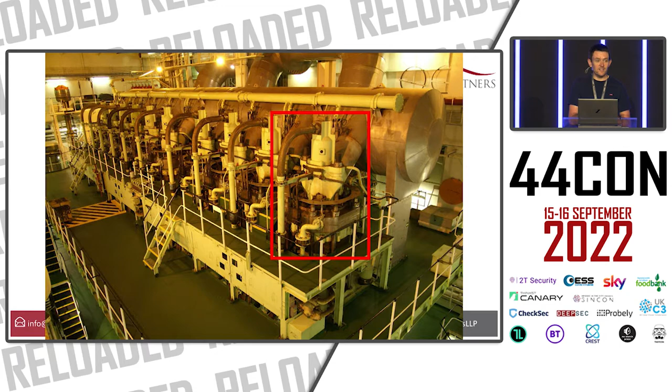So let's talk about ships. Now this is the engine on one of the container ships I worked on. This is just the top bit of the engine. That red box there is just the exhaust valve of one of the cylinders. They're really, really quite big. They go from top to bottom, 3 stories high.

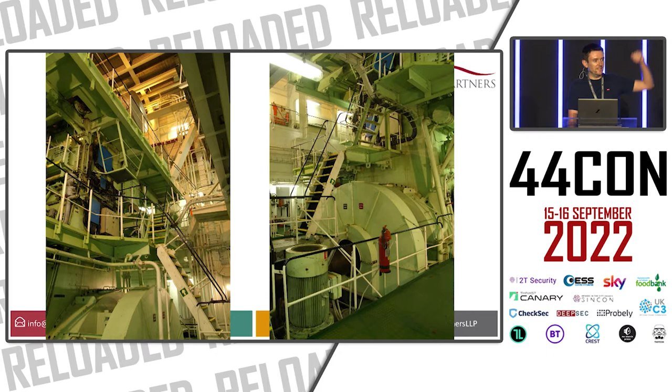Looking up, you can see there's ladders. You've got the bottom plates, the middle plates, and the top plates - 3 different levels on those engines. This is one of the 2 turbochargers on that engine. This here is the inlet side, compressing the air to force air into the engine. The other side of it is the exhaust side.

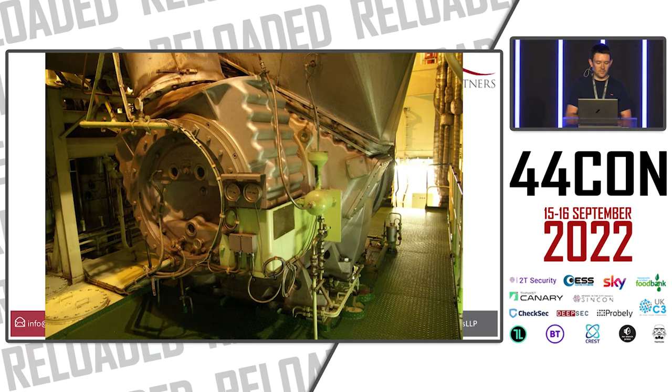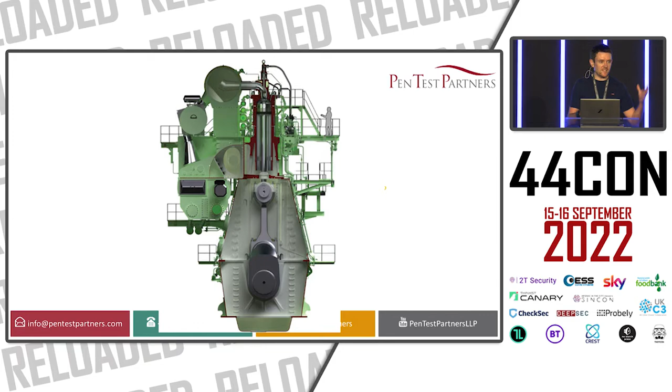This is a cross-section, not my picture. I've never chopped one of these engines in half, and that's a banana for scale. Obviously, you have to shrink it down a little bit. But you can see there's a man stood up there on the top. These things are genuinely huge.

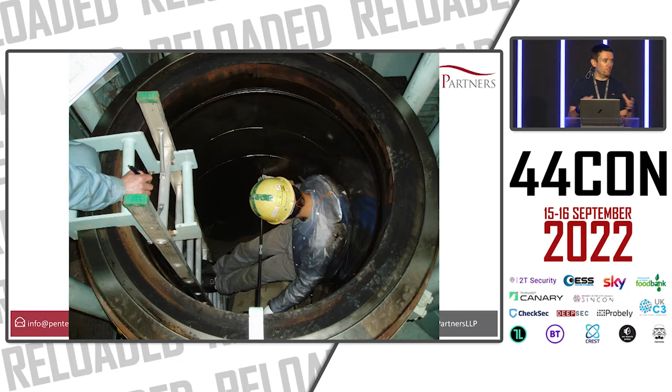This is doing something called taking bores on the main engine. So this is one of the cylinders. We've taken the top off of it, and we're looking to see how wide it is. It's 96 centimeters across, almost a meter from side to side. We're checking how much it's worn. That was on one of the ships I was on before I got on board.

So just to outline that, it's 3 stories high. The one we looked at there has got 10 units - we call them units, but they're cylinders in reality. It's 96 centimeters across, but 2.5 meters stroke, so that piston goes up and down 2.5 meters. That results in 1,810 litres per cylinder. It's a little bit bigger than your normal engine here. It's a 2-stroke diesel engine, though, not a 4-stroke. It's very, very different.

But as a result of that huge stroke, it can only go at 102 RPM - that's the maximum rate that it can spin round at. Compared to a car engine that can do 6,000 RPM, it's pretty different. But it still develops 55 megawatts of power. This is a small power station, dumping that power into the sea. As a result, it burns about 250 tons of heavy fuel oil every single day.

Absolutely massive. How do you get that power from the main engine into the sea? Well, you need a prop shaft. It's a massive chunk of steel that runs from the main engine all the way down to the propeller. There is no gearbox. If you want to change direction, if you want to go in reverse, you stop the main engine and turn it around and make it go the other way.

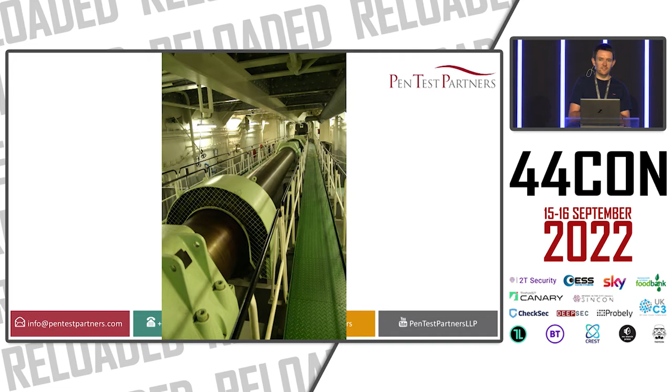A really interesting thing is how do you work out how much power this main engine is putting into the sea. Well, we've got a power meter, like you'd have on a bike or a car. It works out how fast it's spinning, and then it looks at that massive chunk of metal, that prop shaft I just showed you, and works out how much it's twisting. It looks at the torsion on that. If it twists more, you're developing more power.

At this moment in time, we're developing 14.45 megawatts of power. Not that much at that point in time.

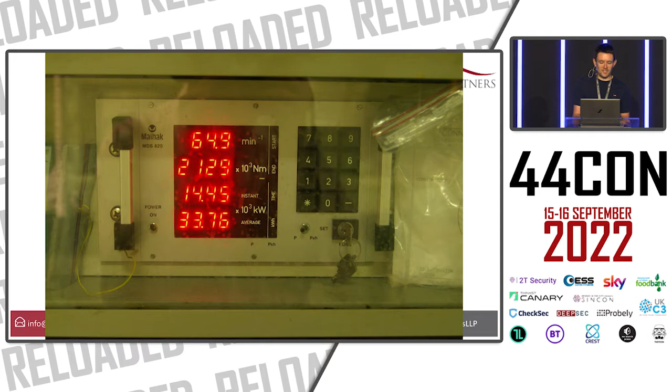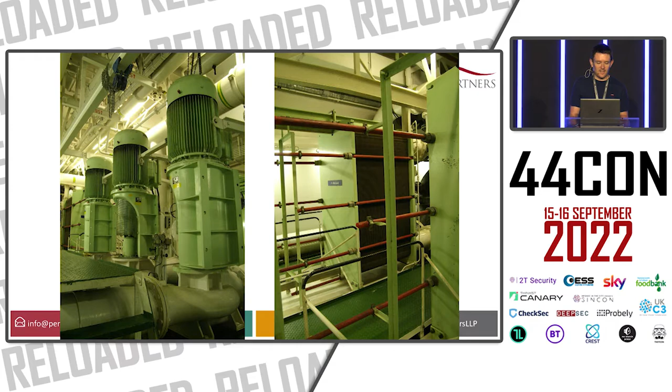How do you start one of these engines? Well, you don't have a starter motor. You start them with compressed air. These are the two start air bottles on one of these main engines. Each one holds air at about 30 bar, a really, really high pressure, 450 psi or so, and you inject it into the cylinders. Like you would with a distributor on a car sending sparks into cylinders, you push air into the cylinders. That's how you start them.

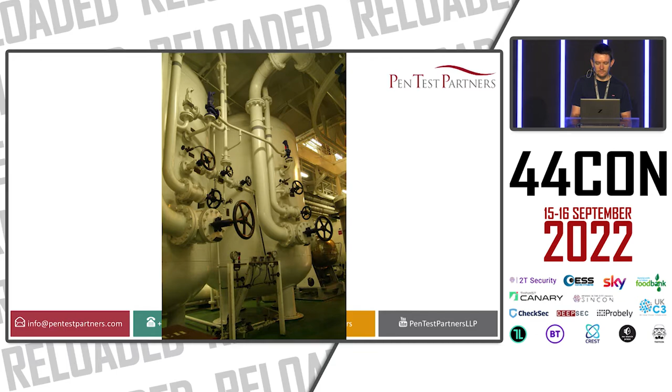Of course, you've got to fill them up with air, so you've got air compressors. Three air compressors there, really, really dated design, going back to the 1950s, but powering these modern engines.

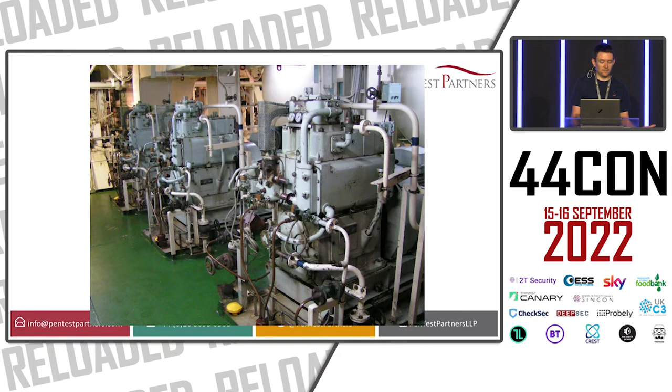Where do these air compressors get their power from? Well, you can't get the power from the main engine because it's not running. So you have four, maybe five diesel generators. Each one of these sits at about 3 megawatts. So you can generate 12 megawatts of power independent of the main engine. That's obviously quite a lot of power.

But how do you start these diesel generators? Well, if you need to start these, you need to fill up another tank full of compressed air, which needs another smaller engine called the emergency diesel generator to start it. It's starting to sound complicated. It's a long chain of things that need to work for the ship to go and run.

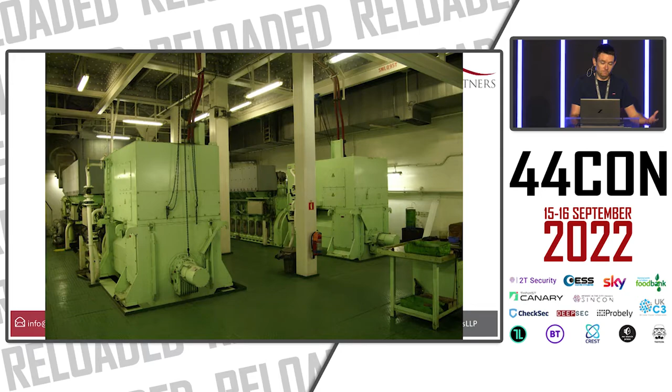So if you want to go from a black start, no power on the ship, you need to start the emergency generator, run a single air compressor, charge the generator start air, start an individual generator, run more air compressors off the back of that, charge the main engine start air, and finally start the main engine. That's quite a big chain of things to occur there.

Now, in emergency conditions, sometimes all of the automatic controls that start and stop that main engine might break, and you'll have to control the main engine manually. On the side of the main engine, there are literally sticks that let you control the throttle on this thing. You call it riding the sticks. So you've got one that chooses which direction it goes in, one that chooses whether you're going, and one that chooses what throttle you're at. So you sit there and you've got to regulate it manually if all the control systems fail.

If you're running under automated systems, you get about 10 or 12 changes of direction. So if you want to go forwards, backwards, that start air will last 10 or 12 starts to the engine. If you're doing it manually, riding the sticks, you're down to 3, 4, or 5 starts before you run out of air. It's a massive difference.

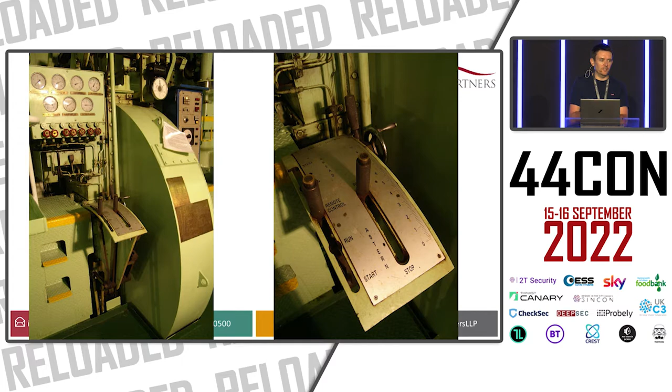So why am I talking about this? Well, a weird thing about container ships is you've just got that one big propeller, you've just got one rudder. If your propeller's not spinning round, if you don't have any forward momentum, the rudder does not do anything. There's no water flowing over that rudder. You will lose control. You cannot steer.

Now, if you can identify threats to any of those individual stages there, through cybersecurity, you could stop them working. You can cause things like this to happen. There are lots of single points of failure in ships.

Nearly all ships these days use something called an ECDIS, the charting system. If you want to plot a passage or know where you are, the ECDIS shows you. When I worked on ships, you used to have a paper chart table with paper charts, and someone would plot where you were going. Nowadays, they've completely got rid of these. You have 2 ECDIS and no paper charts. From an attacker's perspective, if I can take out both of those ECDIS, I've stopped that ship working. It can no longer sail.

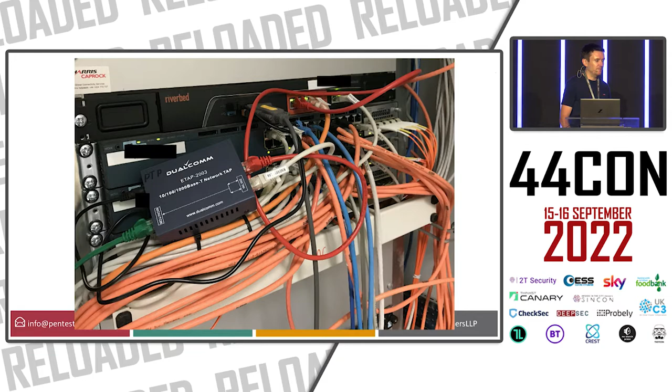So we're sat there on the satellite connection on an oil rig, seeing all that traffic going in and out, and for that whole week we were there, we were just intercepting all the traffic. A real attacker probably wouldn't end up in this position, but we did. What we managed to do was get an FTP user account and an FTP password, plain text, going from the oil rig through to the corporate side of things. It turned out that user was, in fact, a domain administrator. It was synchronizing just some basic files between two systems, but we had the password, and it didn't really matter that that was what it was meant for.

Another advantage we have is, first off, we can speak to people. We can say, how does this work? What vulnerabilities are in this? Most of the time, someone in that company knows these vulnerabilities anyway. They know something that happened in the past, they know some password that everybody knows that's common across all systems. But you often get things that happen the other way, where they say things are secure.

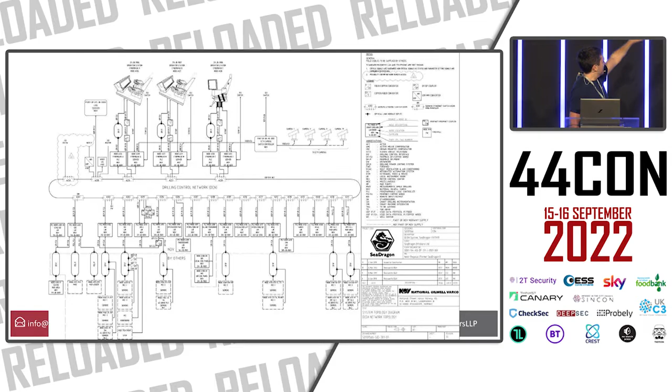On one test they said the drilling control network is entirely air-gapped. The drilling control network is the bit on an oil rig that deals with drilling, not propulsion. So we thought, let's look at the documentation - we're not an attacker, we've got the advantage of having these documents in front of us. This is a diagram of the drilling control network, a large loop network. Amazingly, the chairs where you control the drill at the top are called cyber chairs, which I really like. But we looked at that, and they said this network is air-gapped.

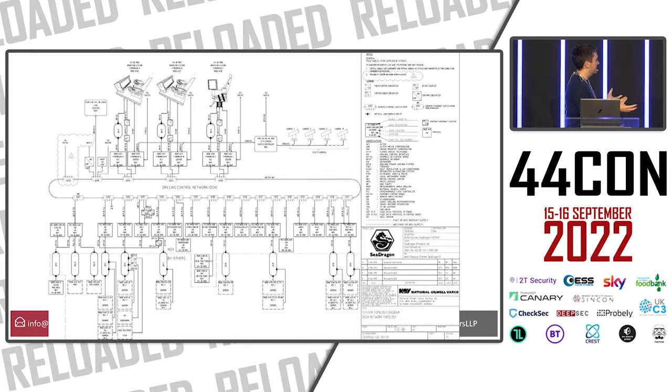I thought that was really strange, sorry it's a bit fuzzy here, but there's this kind of cloudy thing that links off to something called an FW, a firewall. It wasn't air-gapped, it was connected via a firewall. Now in this instance, that firewall was incredibly well configured, but there's a very big difference between air-gapped and a firewall connecting to that system.

Another thing we find is that every vessel will have had changes made to it. People want to get their jobs done, they want things to work. When you're on a ship, you don't have access to Google at high speeds, you don't have the liberty of ordering things from Amazon. So quite often your goal is to make things work - that's your primary goal. So if you have to run a patch cable between two switches to make things work, go for it.

It works, my job's done. But the problem there is things end up deviating from documentation.

That yellow box is a Fluke network tracer. You plug it into a network cable at one end and wave that about in cabinets at the other end, and you can find where those cables go. It's been absolutely invaluable working on ships.

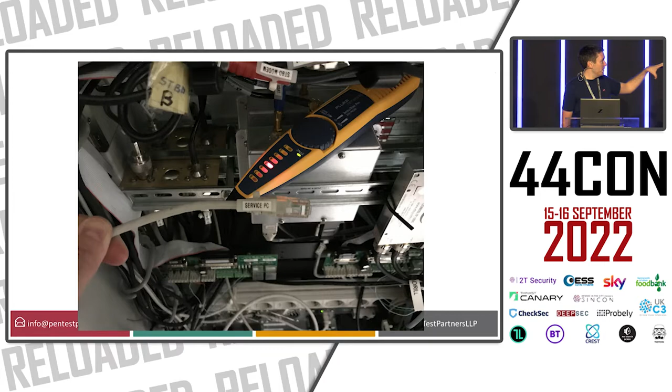We had this connection here, this service PC. There was a PC somewhere in the accommodation on this oil rig that connected through to the VSAT systems.

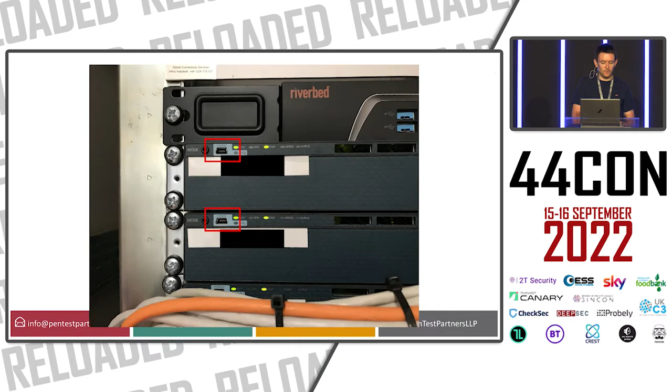You've got physical access, so resetting a password makes sense. It's really easy to do. Reboot it. The only thing with Cisco devices, sometimes they take 6, 7, 8 minutes to reboot, which is a crazy amount of time in an operating environment.

One of the big things with Cisco devices is you can hash your password sometimes, but there's a different type of password called Type 7 in Cisco configs where they're encrypted. It's a hard-coded key. You can turn those passwords back from those encrypted values into the raw passwords.

Now, if that password works on this device and every other Cisco switch on that oil rig, or every other Cisco switch across the entire fleet, we've now got a big problem.

Another thing we found was the use of what's called out-of-band management. If you lose your main connection, SSH into your switches or so on, you want a way to dial back into that vessel so you can remotely access the switches and the firewall and reconfigure them to get that access back. So there's a common device we find called an Uplogix.

It generally connects using slow-speed satellites, something like Iridium—we're talking properly slow speed, like modem speeds from the mid-90s. And it allows you to connect via serial console into lots of different devices. It'll generally be the VSAT modem, router, firewall, and so on.

Now, really strangely, rather than you typing the password in for all of those devices that you want to access, it stores the passwords for the router and the switch and so on locally on the device. I cannot quite work out why.

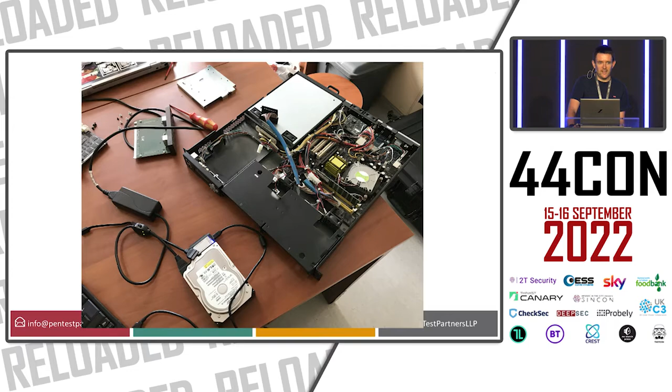And we pulled the hard drive out, read the encrypted passwords, and worked out how they encrypted the passwords. Well, yeah, they encrypted them with a hard-coded key.

Builder, Muck, Dizzy, password. Now, are any of you fans of Bob the Builder? Probably not, but anyway, Builder, Muck, and Dizzy are characters from Bob the Builder.

So yeah, we had the passwords for all of the devices, the router, the switch, and everything. Now, I'm not going to say they were based on the name of the vessel, but they were based on the name of the vessel.

This is a key principle: the compromise of one device should not lead to the compromise of many. If I've got one switch in front of me, if I can get a password hash or a password off it, I should not be able to use it on other devices.

Unfortunately, it rarely turns out like that on ships. Hidden stuff everywhere. Now, Ryan, who's sat here in the front row, a few years ago with a completely different project, a crypto wallet, said much of hacking is about understanding systems better than those who built them, and using that knowledge to do what is supposed to be impossible.

Now, there's got to be nuance around this—there was a big discussion earlier this week on Twitter. But we quite often get on ships, and our goal is to understand those systems. Our goal isn't to just make them work. Our goal is to find all of those weird connections, understand those strange protocols, exactly what's going on.

And that's what we do. We quite often get on a ship and we find things out that no one who works for that company knew about. I'll take you through a few of these.

Now, the way that systems used to work when I worked on ships was you'd have your engine room systems, your bridge systems, navigation systems. They'd be completely air-gapped from the corporate side of things. There would be no connection between them whatsoever. So the only way you could impact navigation propulsion would be if you physically connected to them.

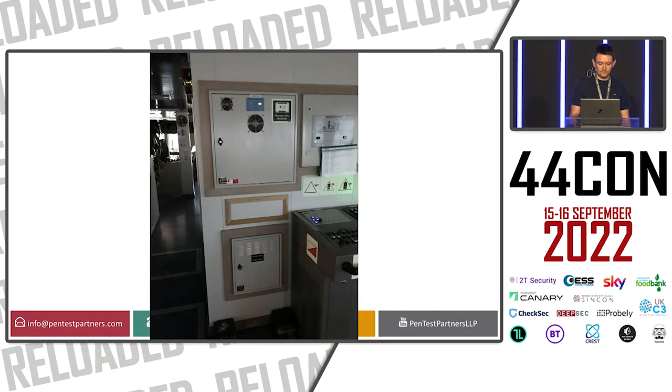And you see that little panel in the middle there? It does have a label on it, but that label wasn't meaningful. It was screwed into the wall. We unscrewed it, and there's our remote monitoring system, screwed into the wall. It was really quite hard to find. Amusingly, my colleague unplugged one of the network cables, and it dropped down into the cavity.

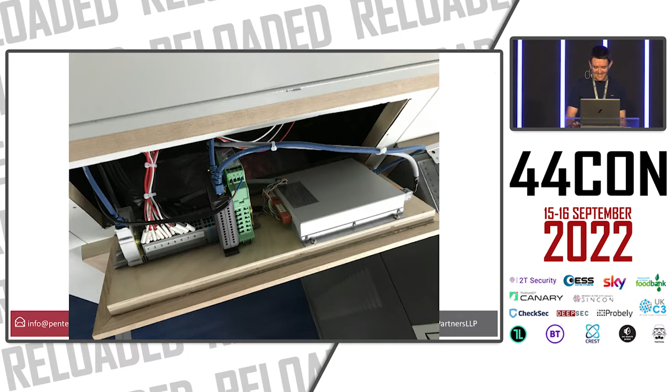Anyway, we had a look at this thing, and it had loads of serial connections coming into it. Industrial control systems love serial. It's a great way of transferring data at low speed and entirely reliably within a defined time frame.

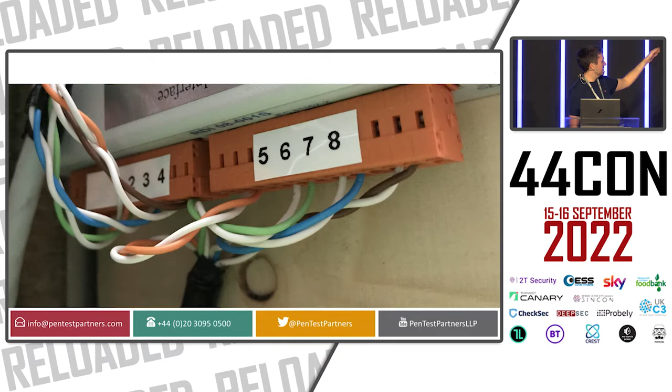But you'll notice something there. There's only 2 wires for each one of those pairs. You've got white and orange, white and green, white and blue, and every third one's missing. It's really, really important in terms of security, this.

And this is what they've done in this case. They only put one of the wires there. This is essentially a data diode. You cannot get data from the monitoring system through to the control systems. So we'd proven that that system was safe from controlling the vessel.

It's really important, this. When you're testing a ship, it's not always about showboating - that was not meant to be a pun. It's not always about showing that you can hack it remotely. Sometimes it's about proving things are safe, making the client feel happy.

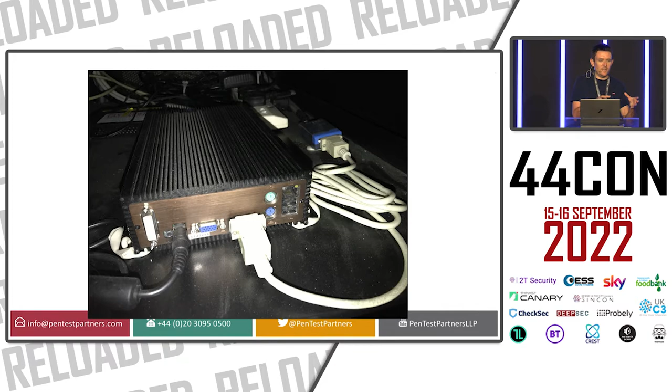But it's not always like this. This was on a container ship, and we found this little box, a little rugged PC, that was just kind of hidden away in a server rack. We thought, well, what's that? Let's look into it. If you've worked in any industrial control systems, you'll recognize these.

It's an IP to serial converter. It takes serial in one side, that receive and transmit, possibly RS-485, a slightly different protocol, and it converts it into IP that you can feed into a computer. Just a protocol converter. They're everywhere.

Now, these were involved with this little box called Blue Tracker. And we kind of traced it out, and we worked out what was going on. It was taking one feed from bridge systems, the ECDIS, which is the charting system, position, speed, and so on. And it was going also to the main engines to find out how fast the engine was going, how much fuel it was using, and so on. And again, we wanted to understand that.

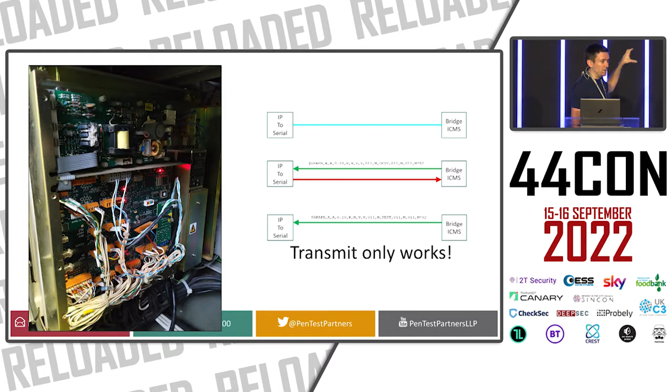Now, again, after a lot of digging about, what we found was this is the ECDIS. The ship's electrician had taken the panel off of it, and we found that serial connection was broadcast only. The speed, position, and everything from the bridge systems was being sent from them to Blue Tracker. There was no way for me to go back in the other direction. So we've said that one's safe. There's not much you can do with that.

So then we thought we'd look at the engine room side of things. It was using Modbus. Now, Modbus is different to normal serial. You've got to poll for values. It doesn't just broadcast what it wants. You've got to say, I want to know how fast the engine's going, I want to know what the cylinder pressures are, and so on. So it's a request-response system. You need that transmit and that receive side of things.

You cannot cut one of those pairs. Now, it might be the case that all those requests being made are just requesting values, not carrying out any actions. But we've got no way of confirming that. There was no documentation. No one understood that system. There's a PLC sat on the side of the main engine that we can make requests to. Not a good position to be in.

So at the moment in time, we've got control, possibly, of injecting things onto the main engine. But you say, well, no one can do that remotely. Well, the thing was, of course, we had TeamViewer on that box. The best thing here was that for Blue Tracker, this system, our client who operated that vessel had not been paying for this system for 4 years. TeamViewer was still completely active on this, so someone could have connected in via the third party, via compromising the third party, and injected traffic. Not a great situation. So this was about risk awareness. Disconnect the system, decommission it, just get rid of it.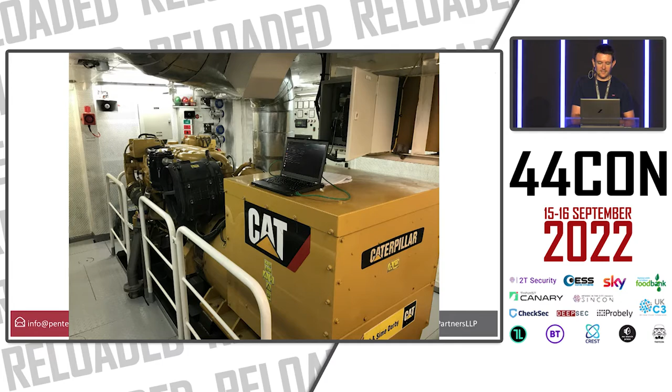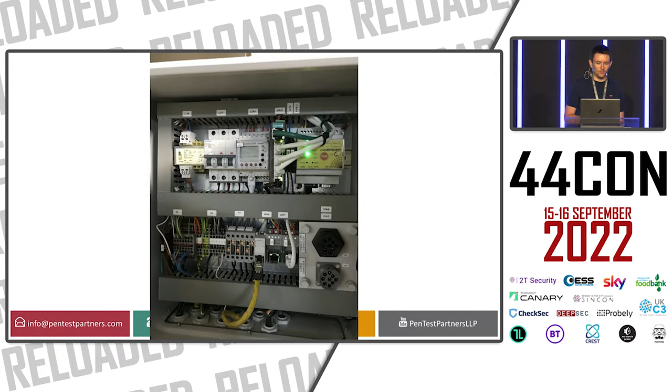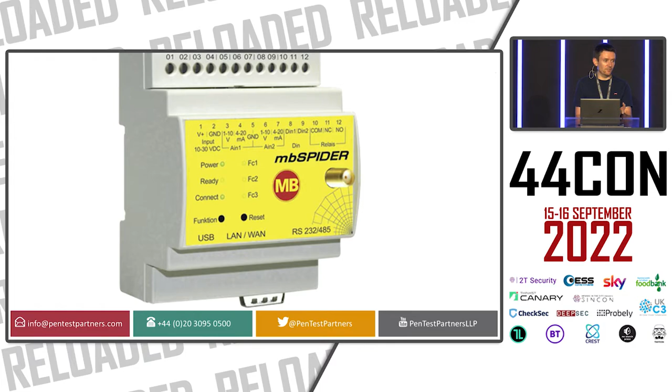Another one we found - this is one of the generators on an offshore tug. I'm looking in the little box on top of it to understand what's going on. Visually inspecting it, something stood out as interesting, that little yellow box on the top right-hand side. So we look at that, and it's a little router, an industrial router. Now, the first thing that piqued my interest was that it had an antenna connection on the front, and it could be a cellular modem - a completely remote connection - but we were on the bottom plates of a ship. There's no way it's going to get a signal. There was no antenna connected.

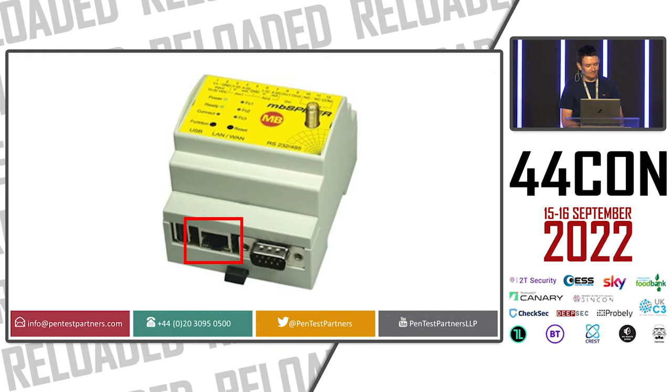But there was something else that interested me on this. There was a label saying LAN/WAN. Now, if you look at your router at home, it will probably have a WAN port for the internet, the wide area network, and a LAN port. They're probably going to be physically separate. Not here - it's the same port. Now, how are you going to provide strong separation to traffic on a router when you're using the same port? Especially when someone's got local access to one of those networks.

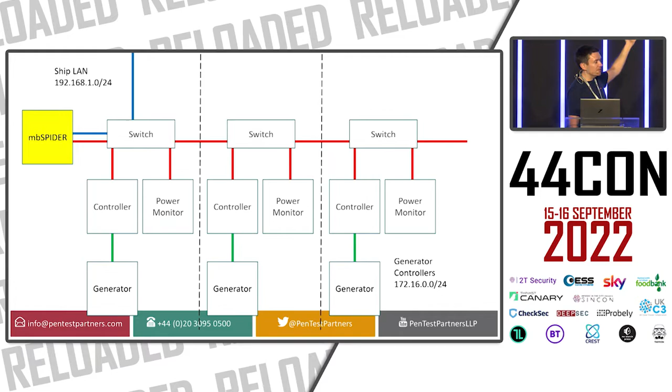So a bit more tracing those networks out, and we found it looked a bit like this. We've got our ship LAN at the top there running on a 192 network. We've got our little router sat to the side in yellow, and then that routes over to the generator network on a 172 network - two different IP domains, two different subnets. The idea is that little router routes between the two networks. But the thing is, I don't have to obey any rules. When I'm on the ship's network, I don't have to be a 192 address anymore. I can become a 172.

So to bypass this security control, to bypass that router, all I had to do was set my IP address to a 172 range. I was through to the generator controllers, and I had control of the generators from one of the cabins on the ship. How did I do that? Well, they'd given us little boxes in the cabins that let us watch IPTV. That was on that same network, that 192.168. I changed my address to 172, and we were through.

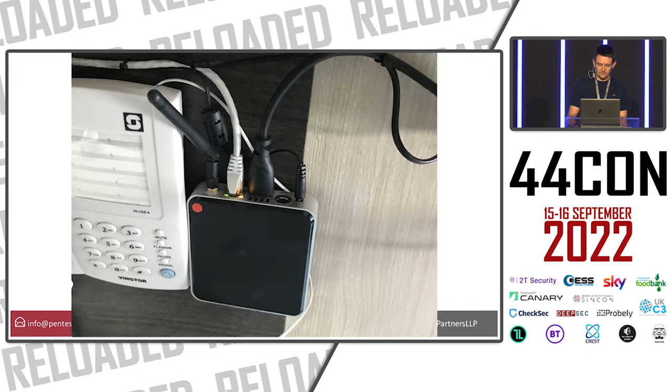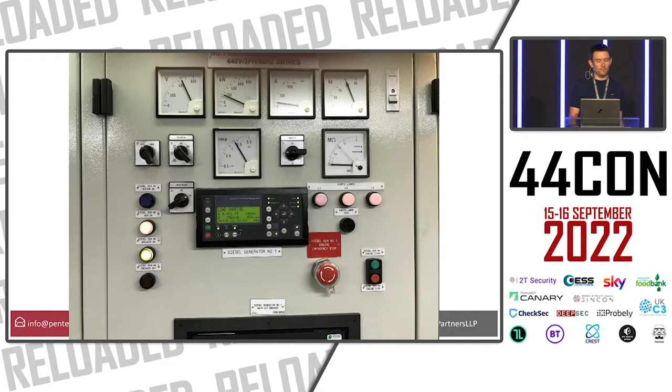It did take a bit of knowledge again. We're pen testers, we're not hackers - well, we're kind of both, but we're not malicious attackers. I could go down to the engine room and see that the diesel generator controller was made by DEIF. I could see how it was working. I registered on the DEIF website, downloaded a nice little tool that allowed me to communicate with the generator. That black line that says GB is the breaker for that generator. I could click on that, and it would disconnect the generator. You could black the ship out. So not great in the general scheme of things.

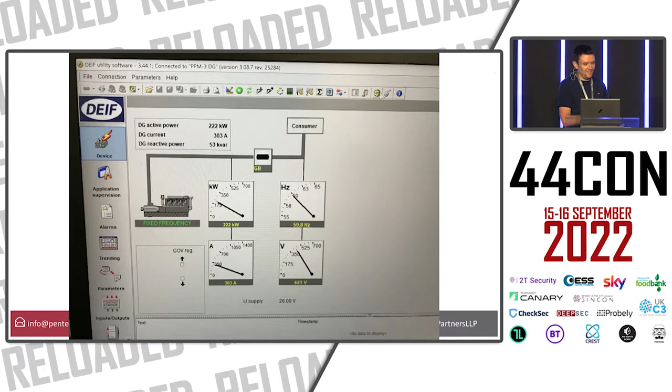Same shit, different ship. Now, I don't know if we're going to call this a 0 day, but I've never mentioned this password before, but I'm fed up with this company. Marine Exchange, MXP.

Every single cruise ship we have ever been on, and we have got domain admin on every single cruise ship we have been on, we have done it via MXP. I'm not joking here, it is everywhere. Look at the names along the bottom there, it's every single cruise line.

What is MXP? Well, I'm not really sure, to be honest. It's a passenger management system, it's a stores management system, it does everything on a ship. But the way it's architected and the way it's secured is just terrible.

It's a server thick client application. A lot of things are thick clients on ships. So we've got a server side and we've got a client side. But we want to understand how that works.

An interesting thing about the way it works is to get the settings for the client, first off, it goes over SMB to a file share, and it will pull down the settings in an INI file to the client so it knows which server to connect to, what password to use, and so on, how to authenticate to it. So it pulls down that file, and it turns out that MXP server is actually a SQL server.

So it's using SQL to communicate with the server. Let's look at that INI file. So the username there, pos to MXP, underneath it is an MXPDB password, the database password. It's encrypted using a hard-coded key.

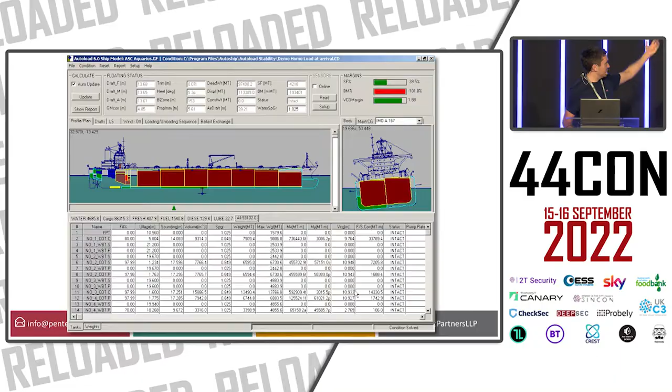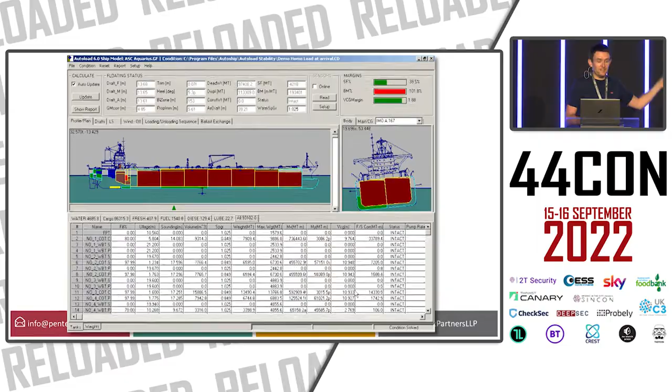It's vital for safety. You can put it into another mode. If you hole the vessel, if you're taking water on, this goes into an emergency situation that will tell you if really bad things are going to happen. So it's crucial, you'd hope it would be secure.

Now, the thing is what we found was it needs to pull those values for tanks. You need to know how much fuel, how much ballast water. If you've got hull stress monitors that measure how much the ship's bending, then you need to pull these values into the load computer. Manually entering them is time-consuming and error-prone.

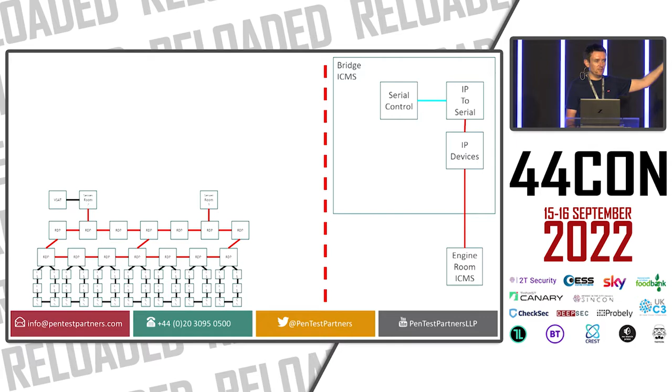So what they do is they read them through serial. The bridge control systems will be reading hull stress and tank levels all over serial networks, and we want to read them. Our little friend, the IP to serial converter, comes in. We've got that, and we have a load computer server. It has an IP to serial converter that connects into those buses and pulls those values back.

Now, that load computer server will be buried in a server room somewhere. It might be behind the bridge, below the bridge, or somewhere else. But to actually use the system, you want to be on the bridge. So they have a user interface computer, a separate device, and somehow they need to communicate with each other.

The thing is that vendors get on board ships and they want to install these systems. They just want them to work. The load computer company doesn't know to go to IT for a cruise company and say we need to patch a private network between these two different places. What they do is they come along, they've got their load computer server down two decks, they've got their user interface, and there's two network ports next to them. They're just going to plug them into those network ports and hope for the best.

So they need to talk to each other. But what they found was they could plug into any ports in the walls, and those two devices would talk to each other. They get a DHCP address in the 192 range. You could just communicate. It was all fine. It worked. They might have only been on board for eight hours. Job done, let's get off.

The problem was that mechanism of plugging into a wall port and getting that 192 address was what they called tar pitting on this vessel. If I was in the bar, the pool, or the cabin, and I plugged into a network port without an 802.1X certificate or a valid MAC address, I would just get dumped into this tar pit. You'd get a holding page saying you're not supposed to be plugged in, and if you tried accessing the internet, you should pay for internet.

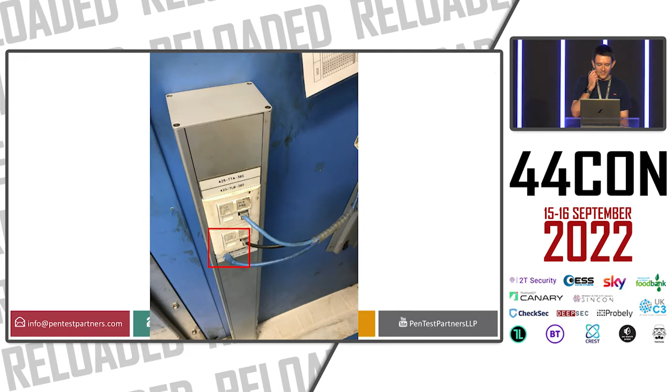Now, the way Windows works is when you plug into a network and get a DHCP address, the DNS suffix populates itself. When you unplug it, it persists. So to me, this is a clue saying that network connection had been plugged in the past. Why is it being unplugged? What's going on here? I like to think I'm a detective, but I just looked to my left, and there was a network cable, literally unplugged from a socket. I thought, well, what happens if I plug into that? And I plugged into it, and I got an address on the corporate network.

So now we've got that jump box going between the business network and the drilling control network. It did have TeamViewer on it - personal TeamViewer rather than the corporate one, because this was shadow IT, something that wasn't authorized. Not great in the general scheme of things. So what they had done is they hadn't provided an authorized way of remotely accessing the drilling control network. So someone went and did it themselves, and they did it incredibly badly.

The next one, fingerprint access control. Sounds like a great idea. I know people have complaints with biometrics, but on a ship you want to control access to the bridge, to machinery spaces, and so on. So this ship added fingerprint access control. Seems like a great idea, doesn't it? Until you meet an engineer.

Your hands end up filthy, absolutely filthy. So what had happened was they found these biometric readers would not read fingerprints for engineers. So what did they do? They gave every engineer a master key, a physical master key for the lock that can bypass it. So now we've got 40 engineers who've got master keys that they can lose - you can't revoke those credentials. Absolutely crazy. It's a security control that was implemented, and because it wasn't done well without considering the users, it made things worse.

The other one, HMIs, human-machine interfaces. These are the screens on ships that you interact with machinery and so on, and there'll be hundreds of them on a cruise ship. There'll be ones in the HVAC rooms doing air conditioning, ones down in the engine room - they'll be everywhere. We've gained significant access before, walking into a swimming pool control room, getting an HMI there, breaking out of it and doing bad things.

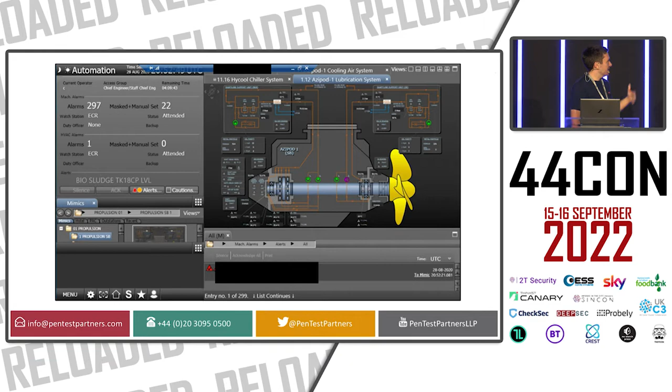So what happened here was the engineers worked out there were 2 high-level user accounts on the ICMS control systems, C and E, captain and engineer, that had a fairly easily guessed password that didn't have that timeout. So what we found was most of the HMIs on the ship were just logged in as these hard-coded users. They weren't locking. Again, someone had added these controls, and they'd just not done it particularly well.

Simplicity can lead to vulnerability. Now, a massive thing that we found over the last 10 years is that ships have moved towards what we call converged networks rather than discrete networks.

Previously, you'd have passenger networks, CCTV, corporate, operational technology, all on physically separate switches, physically separate connections. The thing is, they've all got so complex that running all of these different cables and having all these different infrastructures become really complex. And you end up with stuff like this. Cables everywhere. You can't manage this. You can't manage it remotely.

So they've moved to converged networks, essentially using VLAN trunks. So you run lots and lots of different network connections all down the same cable. And that's great if I come at it from an attacker's perspective on an individual network. I can only compromise that individual network. But we might have physical access. We might be able to take control of one of the switches with a shared password. So if I can get on that VLAN trunk, if I can compromise a switch, all of those networks are compromised now.

Now, one of the things with large ships is they're divided into fire zones, watertight zones, vertical barriers. And this changes how they implement the network. You can't just run cables everywhere. It's fairly easy to run cables vertically. It's really, really difficult to run them horizontally. And this dictates how the ship's architected.

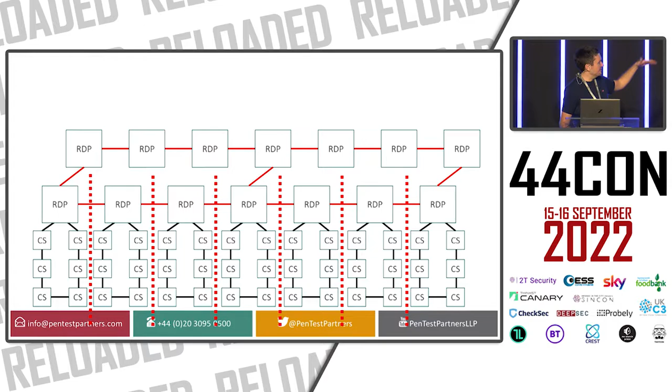We have these things called RDPs, remote distribution points. There'll be one per fire zone, and looped off them will be what are called cabin switches. They're access switches. They take a VLAN trunk through them, and they'll break out different network connections. So there'll be lots of those. You'll tend to have two sets of RDPs for redundancy, port and starboard side. And hanging off them, you've got VSAT, the satellite connection, engine room systems, bridge systems, and so on.

And that trunk running through that RDP loop, running through the cabins, carries lots of network traffic that you might not necessarily want to see in your cabin. To give you an idea of scale, this is one half of a patch bay for one of those RDPs. And hanging off each one of those loops is about 10 cabins. So it's a huge number of switches.

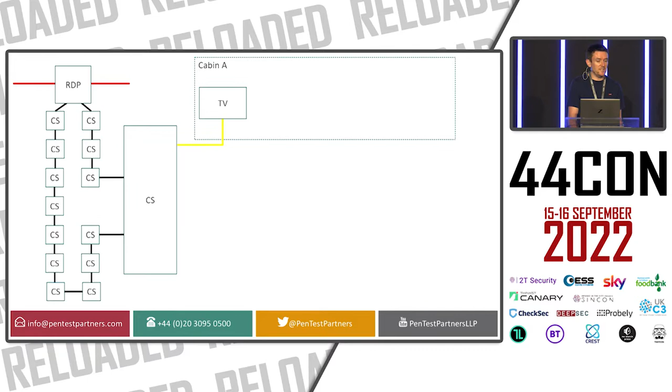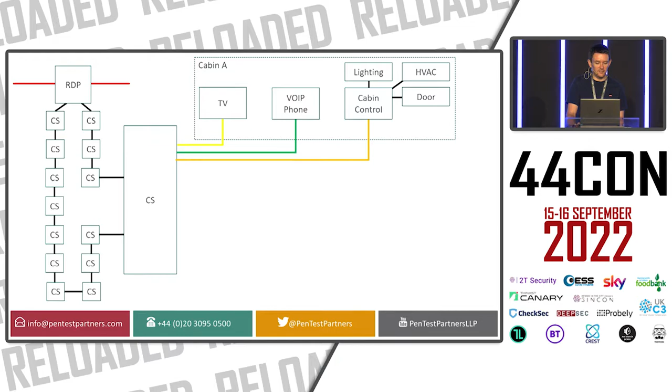Let's break that out a bit. So we've got our cabin switch. Now, each cabin switch has two cabins hanging off it. So we've got cabin A, and our TV will come over the IP network there. Our VoIP phone will come over that IP network. The cabin control system that controls the lighting, the HVAC, the door—you can lock and unlock the door through it—and the water temperature all comes through that network.

So that VLAN trunk gets broken out into the individual cabin. We'll have cabin B, the other side of it, two cabins. But for convenience, because it's difficult making those connections across a ship rather than down, we'll also have things like Wi-Fi access points and CCTV cameras hanging off that network. That means if I gain physical access to that trunk, all of those networks are mine to interact with.

So how do we do that? Well, we first did this when we were on an operational cruise ship. I couldn't sit in a passageway and start unplugging things and messing about, so we needed to do it relatively covertly. So what I did first was I unplugged my TV and my VoIP phone. I wasn't watching TV—I'm allowed to hack a cruise ship, there's more interesting things to do. I unplugged my VoIP phone.

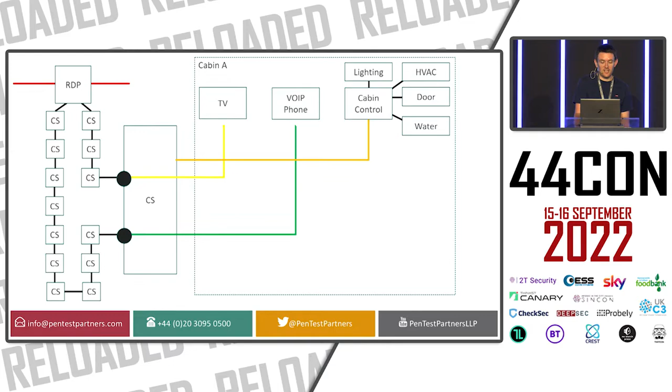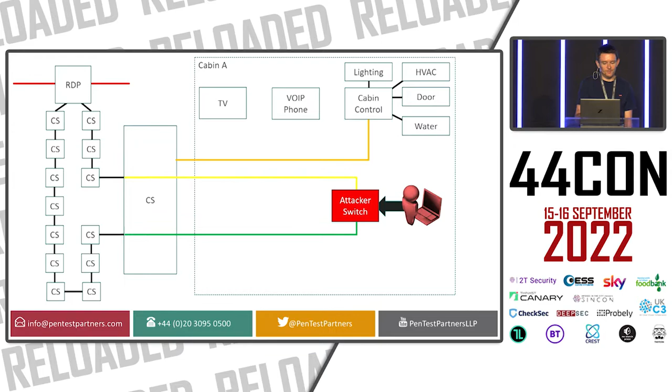So now I've got a connection going from my cabin out to the cabin switch. I then went to the cabin switch, which is just in a panel in the passageway, very little physical access control, and I disconnected the cabin switch from that loop and put my TV and VoIP phone into those connections. So now it's going through my cabin, and then put a switch in my cabin. So now I've got the VLAN trunks coming through my cabin. I can't get TV in my cabin anymore, but that's not really a problem when I want to steer a cruise ship remotely.

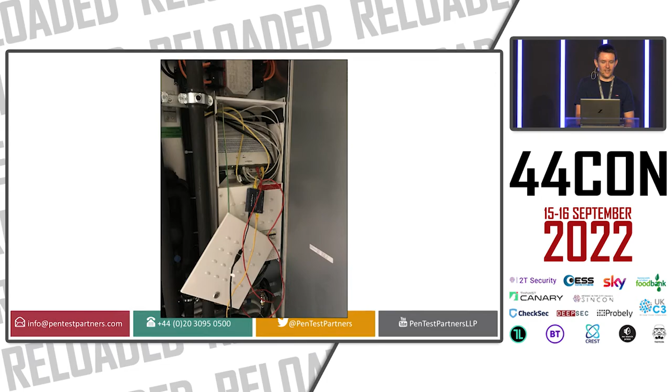We managed to do this in around 2 minutes, give or take. We can open up the panel in the passageway, connect to that, and patch it through to our cabin in about 2-3 minutes. I've done it on a ship, and no one said anything, and I've got access to all of these different networks. So now we've got that attacker switch.

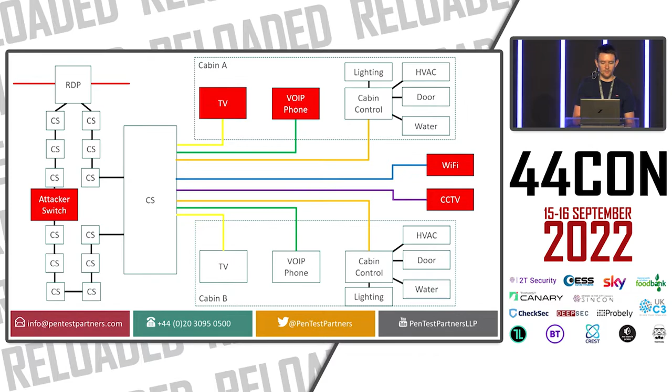We'll be honest, the TV system passwords are all default. The VoIP phones, the passwords are all default. The Wi-Fi had some slight problems. The CCTV, to view those cameras, there was no control on that.

You could just view all of the cameras, several thousand cameras across the ship, obviously redacted somewhat. But we also had access to the cabin control system, which let you change what the lights were doing. Now, this isn't an image from the test - this is an image off the internet, not what we were allowed to do. We did go and say to the client, can we write rude words down the side of your ship using the lights in the cabin control system? And they said no.

Really disappointingly, I found out on another ship, you can't always turn the lights on and off using the cabin control system. They just make a spreadsheet and then send someone who's not paid very much to go and turn the lights on and off in all the cabins.

Right, that's been all the things we found on ships kind of laid out. Let's bring that together. How could you control a cruise ship remotely? Speed 2: Cruise Control, my inspiration for my entire life - still not met Sandra Bullock though.

So the main thing on a ship that controls the engine rooms, navigation, and so on is called the ICMS, the Integrated Control and Monitoring System. That does pretty much everything nowadays. If you turn a rudder, if you start and stop the engines, it could all go through this system. Very, very powerful and important.

But on a cruise ship, you've also got a very important system called the SMS, or Safety Management System. This is a specific room, generally behind the bridge, the safety center, where if there's a fire, if someone goes overboard, if you need to abandon ship, it gets coordinated from here. And it brings together everything - CCTV, watertight doors, ventilation, firefighting pumps, energy. Absolutely everything comes into the SMS.

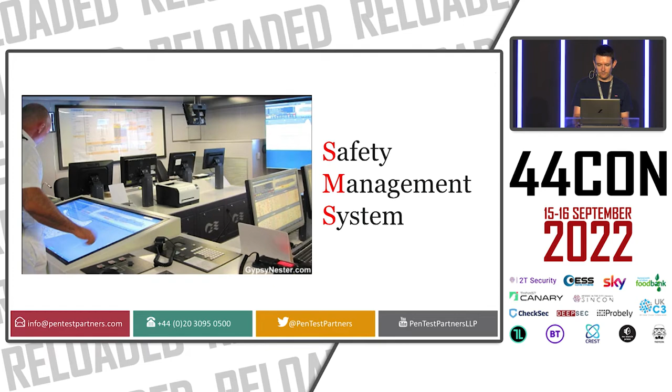As a result, it's got connections through to everything. From an attacker's perspective, it's very interesting. Our goal was to take control over the Azipods on the bottom of the vessel. Modern cruise ships are powered by things called Azipods, gigantic electric motors that can physically rotate - there are no rudders. That was what we wanted to do, and we thought, let's give it a go.

Now, we've already got that attacker switch on the network, so we've got the ability to inject traffic onto trunks. Because we had physical access to the switch, we managed to dump a configuration from a switch. We managed to get a password from that, and oddly it worked on one RDP - it only worked on one of those remote distribution points.

It had been changed on all the other ones. The password we recovered was the name of a vendor, in leet speak to make it a little bit more difficult to work out, but it was just an omission - someone had made a mistake and left it on an RDP. That meant we could reconfigure how network traffic was routed on that ship.

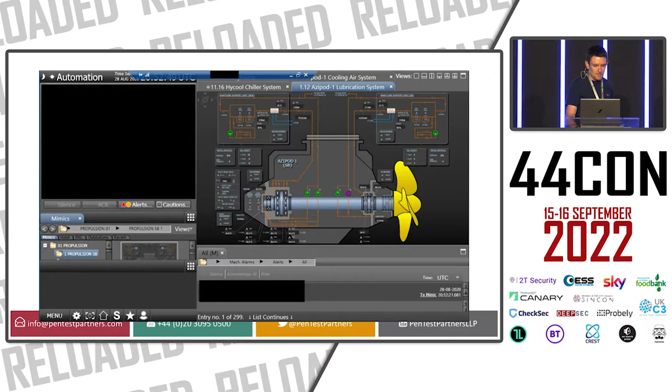Oh, you've seen the big reveal now. Interesting thing with the safety management system was they had these remote tablets. So if there was an emergency situation and you needed to manage that from a firefighting point or something like that, you could take a remote tablet and deal with that. It was a Windows tablet, which meant we could get the Wi-Fi password that accessed the safety management system from there and get the passwords for the safety management system.

So we've now got access to the safety management system. We can control watertight doors - I mean, watertight doors are serious things. They're these massive hydraulic doors deep down in the vessel that you can move backwards and forwards. We can control ventilation, firefighting pumps, and so on.

Now the network had been configured so that officers could connect into the ICMS, the control systems, with a read-only view. So if an alarm goes off, if something bad happens, they can have their laptop or desktop computer and see what's going on the control systems. It was done using RDP, just a remote desktop onto the ICMS system. And when we connected over that, it was a read-only view. You couldn't, even if you logged in as those secret chief and engineer accounts, change anything or change any settings.

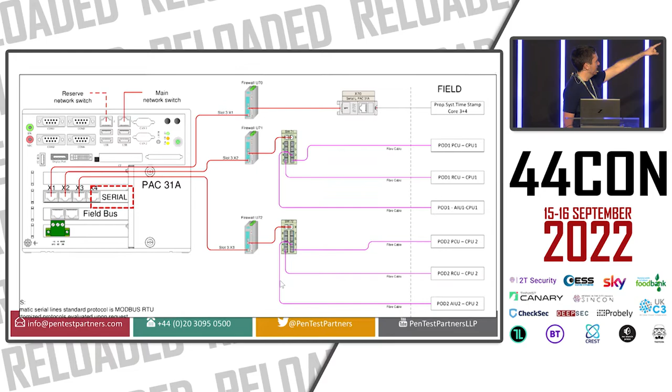It's got a connection there labeled serial, with 4 ports on it. And then it goes through, hits a firewall, and then a switch. Last time I checked, serial doesn't go through firewalls and switches. This was Ethernet - it was serial over Ethernet, but it had been labeled serial on all the diagrams. I think that meant people thought the risk was the same as a serial connection.

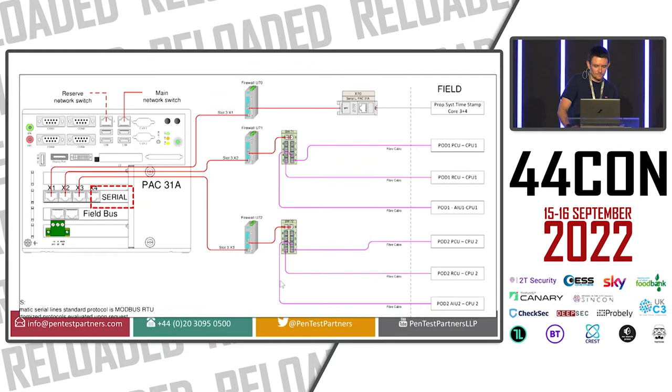We went full inception - I think we were 4 layers of remote desktop deep by the point we got here. But we're now RDP'd onto one of the controllers on the Azipod system. It wasn't just serial. We did need to recover hashes from the Azipod system and carry out a brute force attack - again, something other people wouldn't have the privilege for - but the passwords were not good.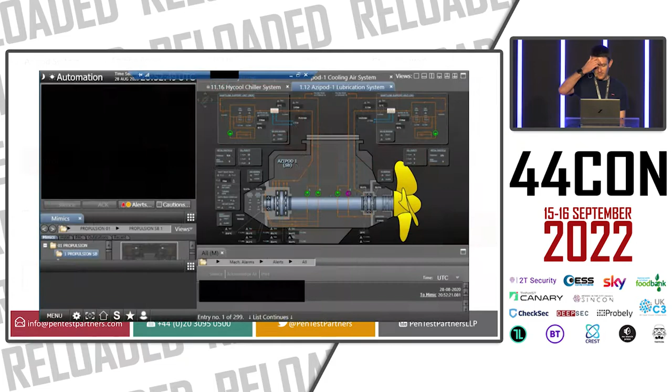So the situation is now we've got all of these different things compromised, which means from my cabin, I've got the ability to control the Azipods on the bottom of the vessel. So that's not great in the general scheme of things.

The thing is, you might say you're still on the ship. Now, I'd like to hark back to Speed 2, where in fact he was still on the ship, so I've achieved the goals of Speed 2. But we want to do this remotely, don't we?

Where did that happen on the cruise ship? It was the cabin control system. Now, we only found this because we were in the engine control room, and next to the engine control room is the hotel control room - the thing that does HVAC, water, and so on.

And I could see on the cabin control system, in the system tray, TeamViewer sat there. I got my colleague to distract people whilst I looked for the password in TeamViewer. The password was long and of relatively good quality, but it was a fixed password for that ship. It wasn't managed centrally, and you'd have reason to believe it would be the same across lots of different ships. It was related to the vendor name.

So we've now got control over the cabin control system. I could turn lights on and off, mess about with the HVAC and stuff. It's not the end of the world, though, is it?